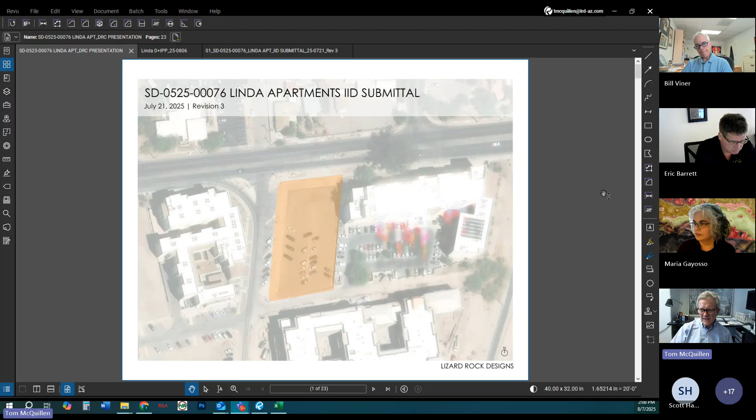As Maria mentioned, we've been through a couple of reviews, both with staff and with Rick, and had a couple meetings to go over and clarify some things.

As was pointed out, this is in C2 and C3 zoning, with a little slice of C2 on this side. It's at the corner of Linda and Congress, Sentinel to the east, West End Apartments to the west. Those are both income-qualified apartments. Bautista, which is a project we're working on, is to the south and is market rate. Monier is over in this direction.

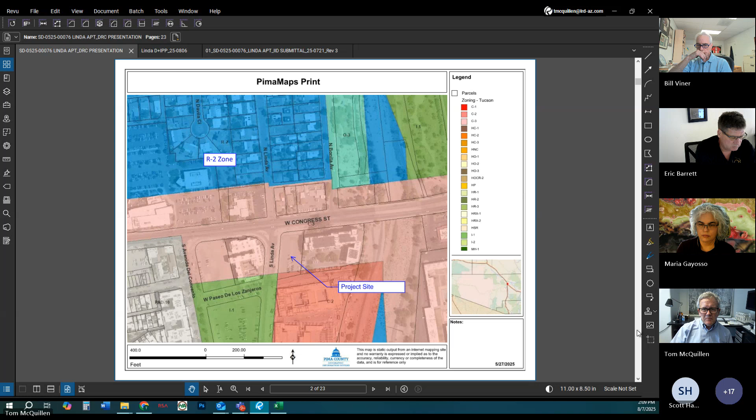Just to remind everyone which site we're talking about, we've got a couple of aerial shots. First, looking from the west towards the east, you can see the end of Sentinel here, at 5 stories. Then you can see the side of Bautista, which is a mix from 2 stories at the front to 3 to 5 to 4 as you go to the back.

This is a street level view of that same area. The site itself right now is empty, being used as a temporary parking lot. It has DG on it right now. And here's the same view from the north, looking to the southeast. In the street view you've got Sentinel here and Bautista in the distance, and West End over to the west.

Quick question: On view 4, the current sidewalk that's there with the parking end in it, is the property line basically to the curb line, and is the sidewalk currently on your site? That's what I'm gathering from your plans. And that's why you're putting in a new sidewalk plan on the west side?

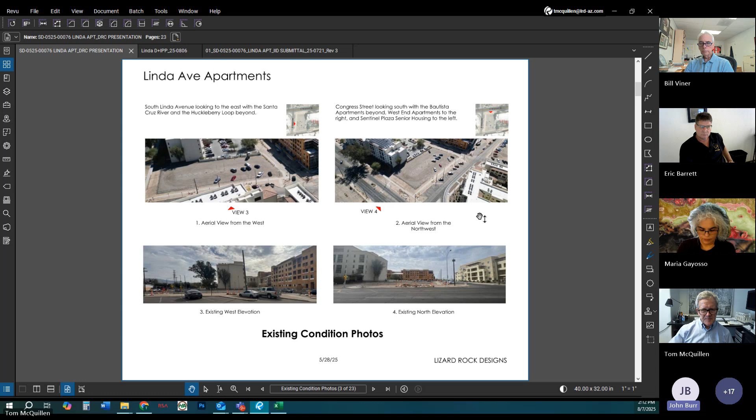So these are a couple of views from pretty much every corner here. This one is from the northwest, looking to the southeast. That's the stair and plaza area in front of it, and there's also a ramp that goes up to the entrance. This is the landscaping I was talking about, trying to get a shaded walking connection down to Bautista and over towards Sentinel.

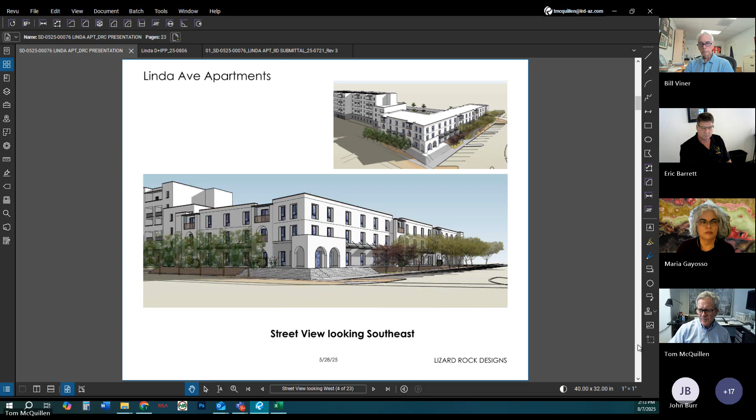These are the actual trees specified in the plan. This is a view from the southeast corner looking towards the northwest. There'll be a screened parking area in the back, with the required number of shade trees in the parking. The refuse area is right at the corner here, which you can see. I can point it out in more detail on the civil drawings when I get a little further along.

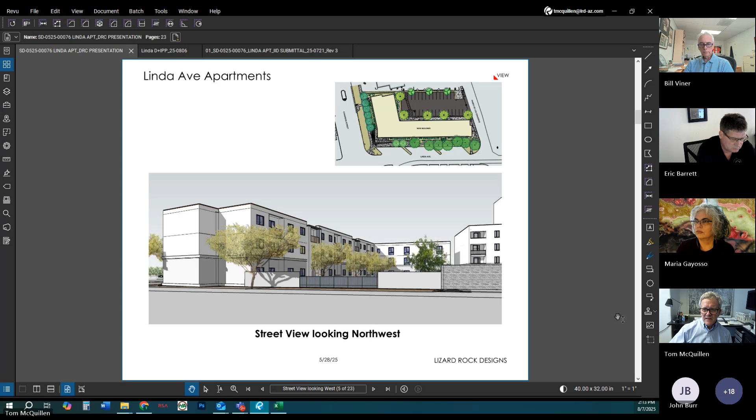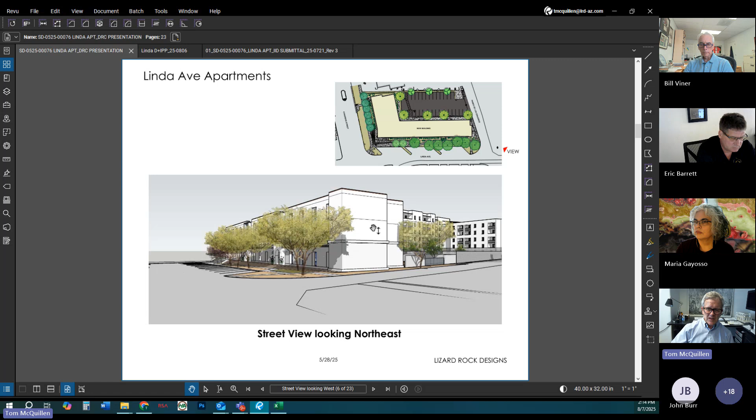And then again, from the southwest looking towards the northeast, basically this is at the high side of the site. It drops about almost up to 3 feet down on this side. You can see Sentinel in the back, which steps from almost 6.5, almost 7 stories down to 6, and then 5 when it comes to where we're at.

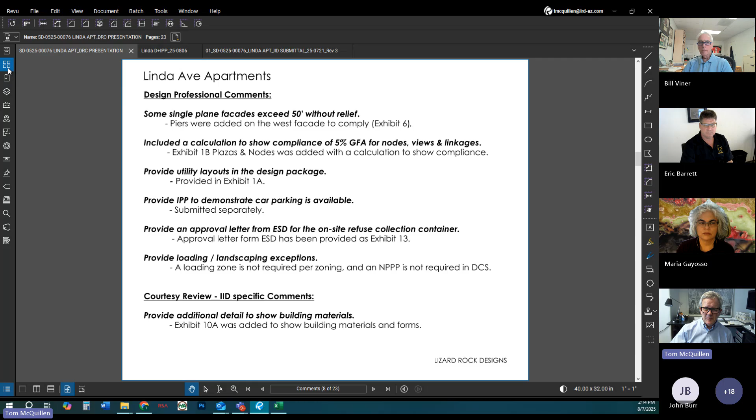So I took the comments direct from our last review with Rick, and then the one pertinent comment from the courtesy review. I was going to, if it's all right with you, go through each of them and then go to the exhibit that responded to it. And at the end, I'll run through everything just to see if there are any questions or any parts that I missed.

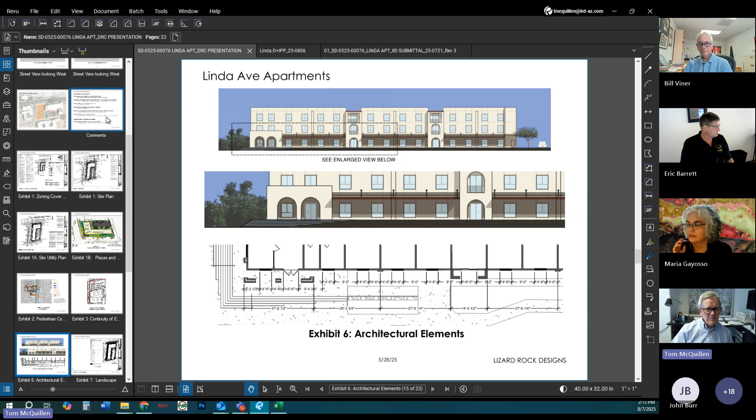So one of the initial comments was that there were two or three sections of the west elevation where the length was 54 feet, and the prescriptive limit on that is 50 feet. In Exhibit 6 here, this shows what we've done to bring some relief to it. We added engaged piers in between each one of these, and it's basically cut that distance in half. It seems like a small change, but actually in one of the bays, we had to flip every layout in it. But we've got the required relief in the facade there.

Rick had asked us to include a calculation to show that we had 5% of the gross floor area in an exterior plaza open to the public. So we added this diagram, by our landscape person, that shows the area behind the public sidewalk here, which is equal to a little bit more than 5% of the gross floor area. Now it does extend over to this landscaped area, and it extends back into here, but we wanted to just demonstrate compliance with that diagram.

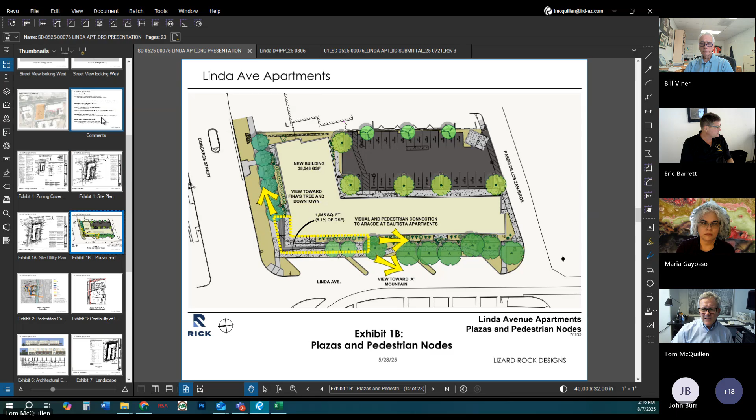And there was a request that we show the utility layouts. So in our civil, we've got the base cover sheet that has all the data, number of units, number of parking spaces, square footage, all that. Then our actual site plan that shows the new sidewalk and the connections, which was related to another comment, and then we added the utility plan.

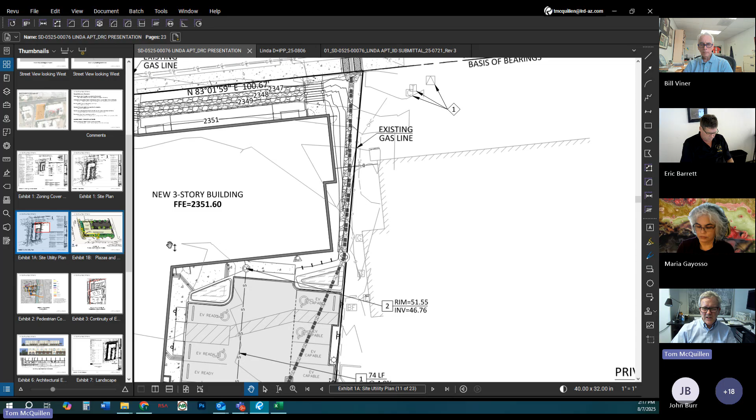Just to run through the utilities right now, TEP is telling us they want to bring transformers into here and go to two essentially meter packs within the parking area. We have a gas line up here that connects in through the building and then feeds a central hot water heater.

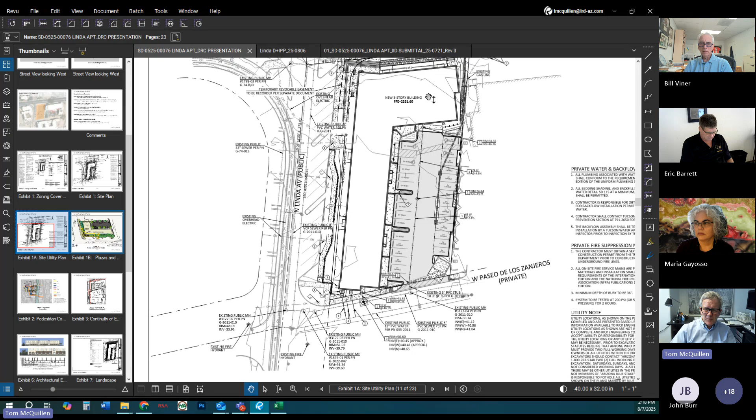Most of the other connections are on the south side of the site. So there's water, there's fire. There are two sewer connections, one to a new manhole right there, and that serves basically the south wing of this building, and a second one that comes all the way up through here to serve this portion of it, and then connects directly into the existing sewer line there. I think that covers everything for the utilities.

So then one of the comments in a couple locations was to provide an IPP to demonstrate that the car parking is available. And that's obviously been submitted separately. As Maria mentioned, it's being reviewed right now. I can talk in general terms about the IPP if there's a question about it, but I thought I would just leave that until a little bit later.

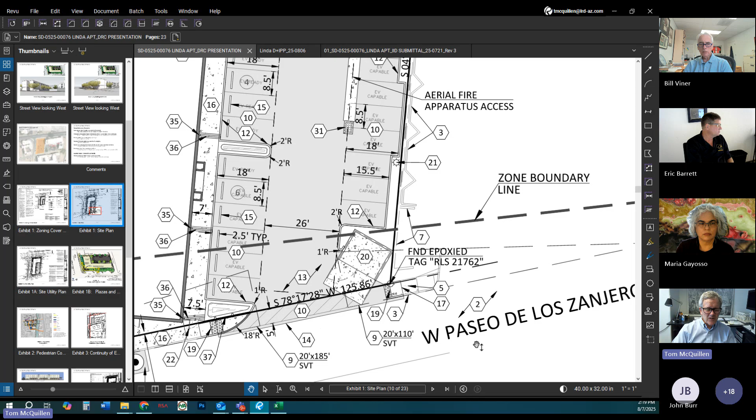Then the comment to provide an approval letter from Environmental Services, which we've got here. They've looked at the layout. The layout is pretty much the same as the typical layout, but it needed to be 2 feet wider. So we have a detail on the civil drawings that they've reviewed and signed off on. That's actually very similar to the layout that Sentinel has to the east of us.

And then there was a question about exceptions to the loading and some landscape requirements. I've summarized this - there's actually some detail in the application, but basically if it's entirely a multifamily project, the loading zone isn't required in zoning. And in the downtown core subdistrict, an NPPP is not required.

Then there was a request at the courtesy review that we provide more information about what the materials were going to be like. Now, these are some further developed elevations from what we showed in the initial courtesy review. Overall, it's primarily a stucco building with some arches and a darker colored base to it. The height is 37.5 feet to the parapet wall.

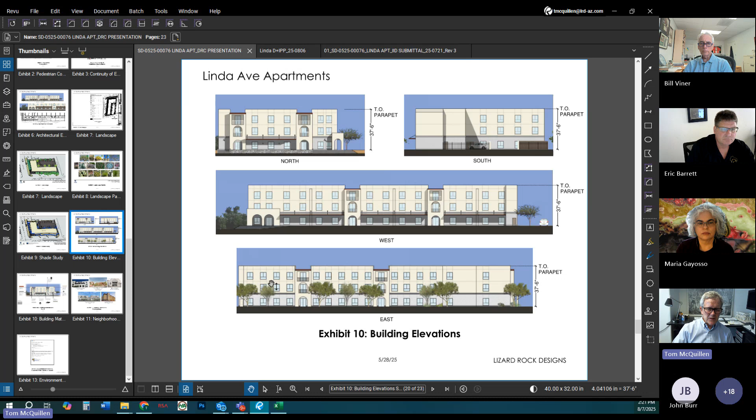By comparison, Sentinel to the east is about 2 stories taller than that. And as I mentioned, it steps down from almost seven stories to 6, to 5, to this, which is about 3.5 stories at the parapet. But we also provided this exhibit, which calls out in more detail the colors.

So our base color is basically a color called bone white. It's been used on, I believe, Monnier, and we've got a similar color on Bautista.

The darker base colors are 2 different shades of a warm gray. And then we've got accent colors that are basically terracotta on some of those linear pieces, including these suspended canopies. I know the canopies were shown as individual pieces in the original perspective, but they're actually going to be continuous like they're shown here.

And then we've got a taupe color for the window frames, essentially the same color we used on Bautista. And any scuppers, downspouts, and all that are in a dark bronze color to match the attachment pieces, the railings, and the rest of the project.

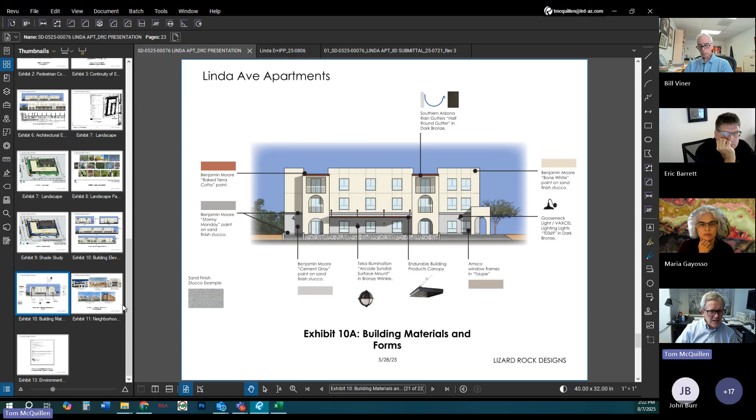And just to look at some examples around, you've got the Mercado, where those suspended canopies are shown. The Sentinel was a little bit yellower color of stucco. Monnier was closer to that bone white color, as is Bautista. Sentinel and Bautista have some accent colors very similar to it. And again, I had pointed out the engaged piers from Monnier.

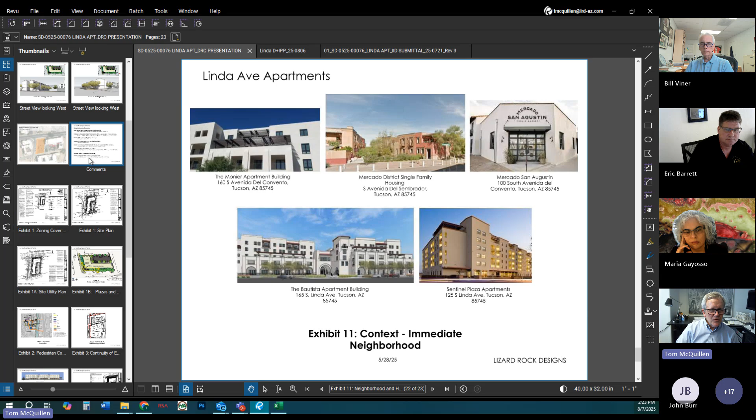So the intent is to pick up the language and some of the details from the four other major buildings that have been built in this area. So I'll just go back to here. Those are the comments. I can take you through any of the details.

I think Maria went through some of them. It's 77 units, about 38,500 square feet of construction. It's a mix of 2 bedrooms, 1 bedrooms, and studios. The majority are studios and 1 bedrooms. And I mentioned the height, roughly 37.5 feet.

And then the parking, there are approximately 25 spaces on site. The IPP takes advantage of existing unallocated surface and street parking. That comes from doing an analysis of this area south of Congress, of all the available parking spaces, and comparing it to all of the existing IPPs that have already been filed.

So, sorry, was there a question? I have some questions regarding the parking.

Okay, are you going to have a long-term lease arrangement with somebody else to provide more parking? You're at 0.30 per unit right now. How does that work?

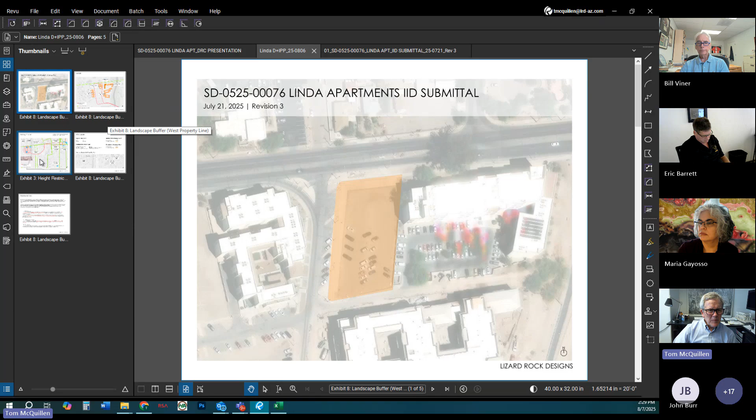So I can talk a little bit about that, and maybe what I could do real quick is just talk about the calculation I was mentioning before for the IPP. This is a really simplified two-sentence summary of a 30-page document, but the IPP is confined to this area south of Congress. It does not rely on a mythical parking garage at the center.

It does include every project that's currently either under construction or in permitting in that total of required, possible required parking spaces. And when you go through and account for all of what's available either on streets or in temporary lots, there are still 53 surplus spaces, I'd call them.

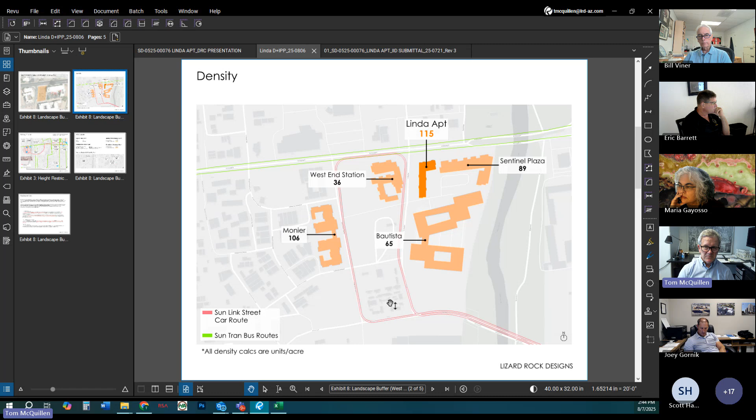I think what Steve has been saying, just to amplify it a little bit—if you go up, let's say you've got structured parking, which would be less than underground parking, and then you go, let's say 5 over 2, you've got the cost of the structured parking, which is $60,000 to $100,000 per space. You've got an elevator, which for a 7-story building is going to be in the $150,000 to possibly $200,000 cost range. And then you have to go from type 5 construction to type 3 over type 1, and that's, in simple terms, about a 100% increase per square foot. When you add all those costs to the project, you can't possibly make it something affordable that this person could afford to live in.

So these are walk-ups—there's no elevator in your building? No, there's no elevator. It's 2 flights of stairs up. We never got floor plans, so... I wasn't aware we needed to submit floor plans. You don't. Okay.

Well, that explains for me why there's no senior adults in the project—unless they're very fit senior adults who can go upstairs, but it's 2 flights of stairs.

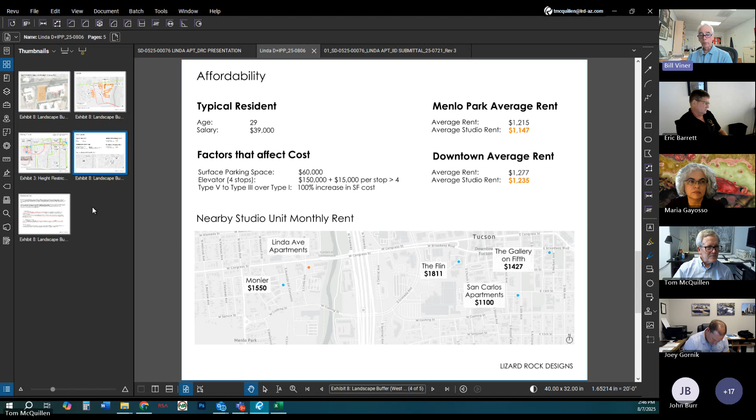Yeah. Anyway, my primary concern is that once all the buildings are built in this neighborhood and there isn't enough parking for the people that live in those buildings, I don't know where they're going to park. They're going to park in places that are uncomfortable for the balance of the neighborhood. That's just my thinking. At a 0.30 ratio—I'm in the same business, I've never built anything at that low ratio, but again, I've never built anything in the downtown area. So, anyway, that was just my concern.

I have that concern as well, Bill, in terms of some people parking their cars in Menlo Park and taking away spaces for residents who have to park on the street. I think that's one of the things that needs to be considered in this. You may have units with 2 cars that come in, regardless of what you're thinking in terms of public transportation. So there's always that part of it too.

In 20 plus projects, we don't have anybody with 2 cars. So that's, I mean, you could say that, but that's not a reality in our type of project.

Eric has his hand up.

Eric? Yeah, thank you. So I guess the short answer for me, part one, I believe this whole development was designed and placed here because of the demographics that support low amounts of parking with the clientele there, the Mercado overall development. It sounds like we have an excess in addition to what's already been allocated of 53 additional spaces that would not be accounted for, that could go to other developments as they're moving forward. And last, in the chicken and egg discussion, if we want to create an environment of less urban sprawl and more density, then we need to do things that take this kind of stance. So if I factor all those in, I'm for the project. I can't not be for the project based on what my understanding is the city of Tucson's trying to drive, what this Mercado development is trying to drive, and what now this developer coming into Tucson is trying to drive. So all those things being equal, they've met the intent and requirement of the project.

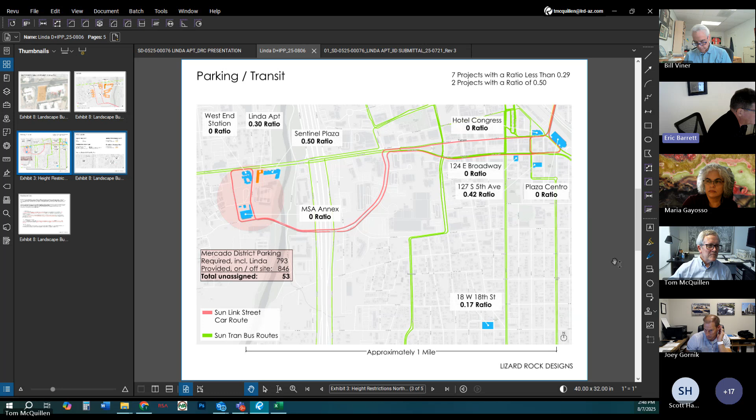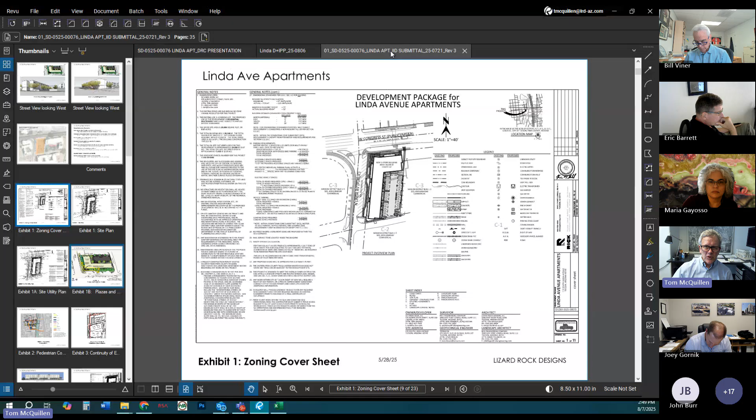Well, first we need to see if there's any more comments from either staff, the presenters, or committee members. Is there more you want to show, Tom? No, I mean, I did bring our full submittal, but primarily we've listed the 4 things that are kind of asks from the IID process.

I do have one question. The newer perspective shots that you included make it look like it's a solid masonry building with deep inset windows, but when I look at the floor plan, it looks like they're inset 2 inches. Can you confirm how deeply inset the windows actually are? Because if you look at the front version, the shadow line makes it look almost, or just go to the west elevation, it makes all the windows look like they're inset by about a foot, but they're relatively flush, being only 2 or 3 inches within a 6-inch frame wall, or even 8-inch.

You're on mute. You're on mute. Hey Tom, I'm mute, thanks. I got it, can you hear me now? There we go. Yes, yeah.

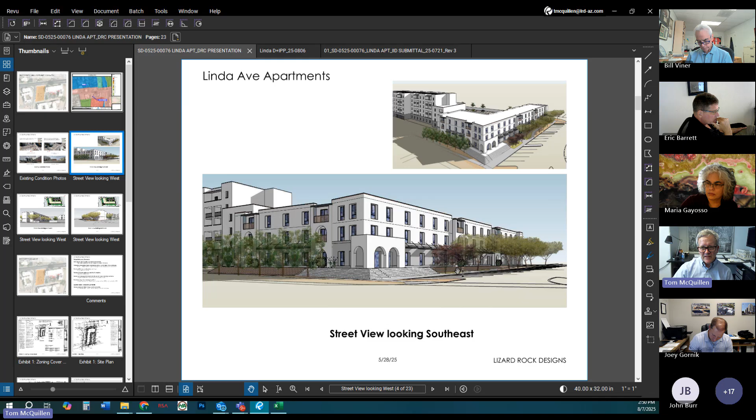So you're correct, this one was an earlier view. Unfortunately, I don't think we will have windows that are that inset. They're probably more like this view. Yeah, they're about 2 inches in from what it looks like. Yeah, they're a little bit more than that, but because of the foam that we have on the project, the relief, part of the aesthetic of the building is that the relief comes from these sort of tower elements, and then the rest of it is planar. It's similar to what was done at Sentinel. At least they're not flush. Yeah, I agree, I agree.

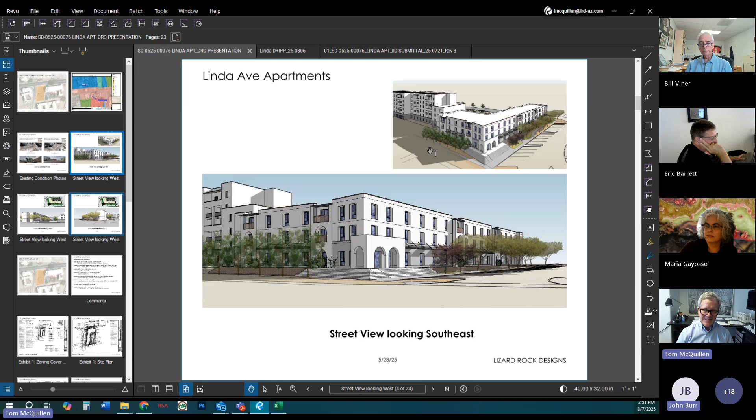Okay, I won't ask the contractor to comment. I just wanted to make that clarified. Thanks, I understand your comment, and we hope we can find a way to do that in the future, that doesn't bust the budget.

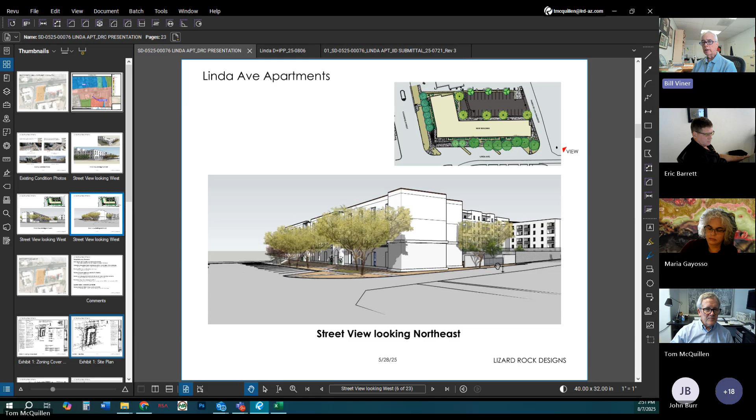Okay, just one other comment. Did you say earlier that the parking is gated? In other words, the spaces are private, you need something to enter, and then there, is that true or not? It's fenced, it does not have an electronic gate to it. So the parking is open then, correct? Yeah, but it's fenced on all sides, so it's a controlled parking lot, people can't walk through it. By the way, I'm not opposed to that, Tom. If this group wants a gate, we'll put a gate. Again, not opposed to that if that's something that's needed.

I was actually more concerned about, are you going to see the dumpster right on the street unless it's hidden by a gate? And I think that it is hidden, correct, Tom? Yeah, it has doors on it that staff come out and open when it's time for the trash service to come pick up the dumpster. But it's pretty standard for the city of Tucson, they have their requirements you have to have.

So you may choose to add a gate at a later time if you need to control the parking more, to make sure it isn't open season, so the allocated spaces stay allocated. It's not in the current plan, but I'm not opposed to it. I don't know that it's a requirement. But if it became a problem, we would do it.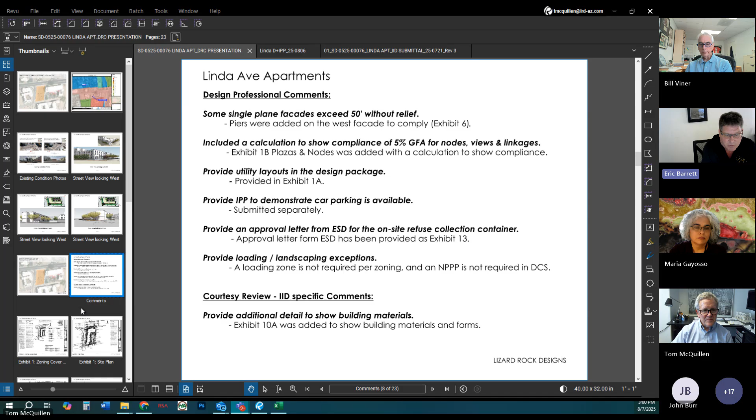Honestly, my true opinion is I'd rather have less roads and less parking and more open space and landscape. If we're trying to go more urban like I stated before, we can't keep providing more parking because that requires more roads. So if we're not trying to be California and provide roads everywhere, let's not do that.

But let's not hold a developer trying to do a project hostage if we're supposed to be saying we're going to be this kind of community.

So I think it's the chicken-egg scenario you're bringing up, but at the same time the developer is trying to do what they've been asked to do. This has got an awful lot of shade trees, where it's hard to put shade trees in a downtown urban development, which I'm honestly not really opposed to.

The other thing I think we need to keep in mind—even though a lot of the players are the same—the two different projects we looked at together are actually separate projects in separate zones with separate development partners, so they're not as related as we might think.

So in my mind, this project for this particular site meets the criteria to approve it as presented, with the condition that we encourage the planning director to initiate a survey of actual spaces before any further IPPs are made in this area.

Or try to find a way to provide public parking garage or whatever. Well, that's great, but the city of Tucson discovered it was bankrupt the last time it built garages, so that's never going to happen at a municipal level. Exactly, it's just not going to happen.

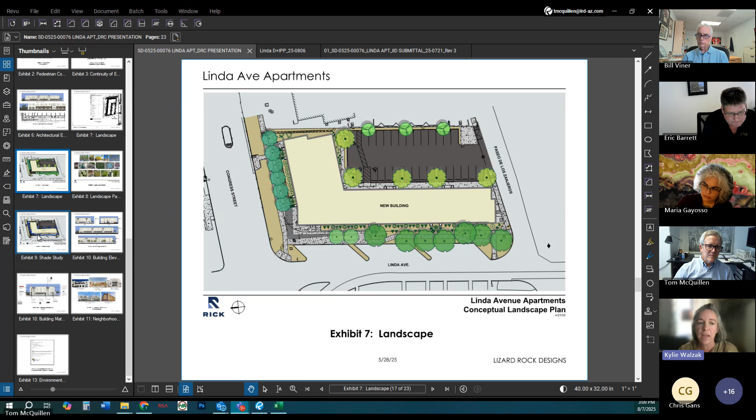Also, speaking of transit users, if we wanted to really market this towards transit users, we would make this more accessible for people with disabilities. The stairs at the front entrance make it so people who are wheelchair bound or have mobility difficulties can't really rent here. I know that's not your charge, I know you're not tasked with building that, but I just want to point out that people who rely on transit often have disabilities and can't use stairs to walk up and down.

Do you have a ramp on there? I don't know if I could see it. Okay, great. It looked like the ramp though took them really far out of the way to get to the streetcar stop or the bus stop. The bus stop is right across the street on Linda to the west.

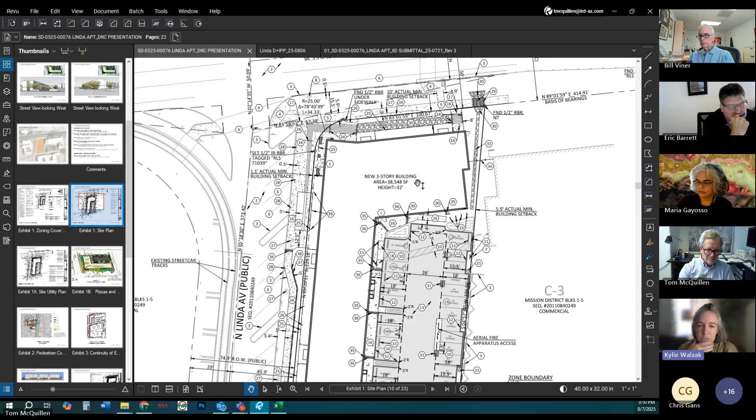And then last, I just wanted to respond to the comments about density. When we're talking about density, it's not necessarily calculations per unit, but it is height. I do want to point out, as was mentioned, the Sentinel Plaza apartments to the east are 6 stories, and West End Station to the west is 4 stories.

And Bautista to the south are 5 stories, this one's 3. When you say in your comments that you're scaling down, my question is scaling down to what? Because West End across the street is tall. We prefer to see this be taller and have more units.

Thank you. Can you state your address as well, Ms. Walzak? This is Kylie Walzak, and my address is 232 North Melrose Avenue. You're the president of the Menlo Park Neighborhood Association, is that correct? Correct, but we did not vet these comments with the association, so these are my comments alone.

Thank you. Any other comments? Tom's got his hand up twice. I think he wants to respond. I didn't mean to do it twice, I just didn't know what the protocol was. But I wanted to wait until everyone had a chance to speak. But it was just two quick things.

One was just to clarify the comment on density. We used the straight definition of density, which is units per acre. And in terms of the height and everything, I won't go through it again, but I'd refer you back to the data we provided about what happens when you go from 3 stories to 7 stories. The simple version is it becomes unaffordable for a person that fits the demographic in that exhibit.

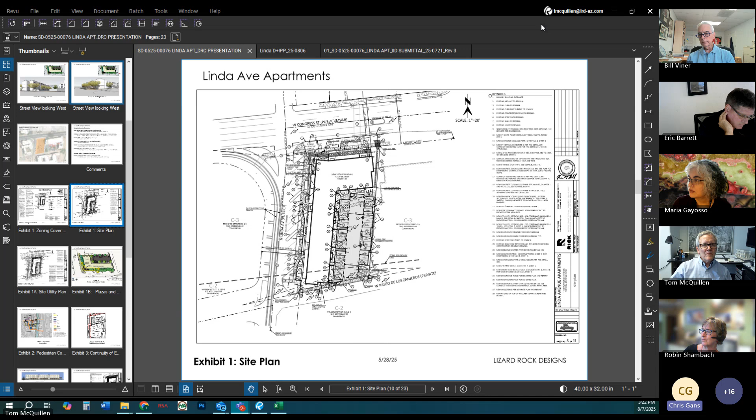Okay, here we go. Mr. Barrett? Aye. This is the roll call for voting on the motion. Mr. Burr? Aye. Mr. Gans? No. Mr. Gonzalez? Yes. Mr. Viner? Yes. I'm here as well, Chair, Maria.

Motion passes. Isn't Robin on the call? Pardon me? Robin's on the call. I am here as well. Oh, you made it. Okay. Can you let us know what time you arrived, Ms. Shambach?

Do you have any comments? I do not. Ms. Shambach, can I add you to the roll call, or is there anything else you need to say? You may. I am ready. Yes, my vote is yes. So, Mr. Gans, members of the DRC, the motion passes 5-1.

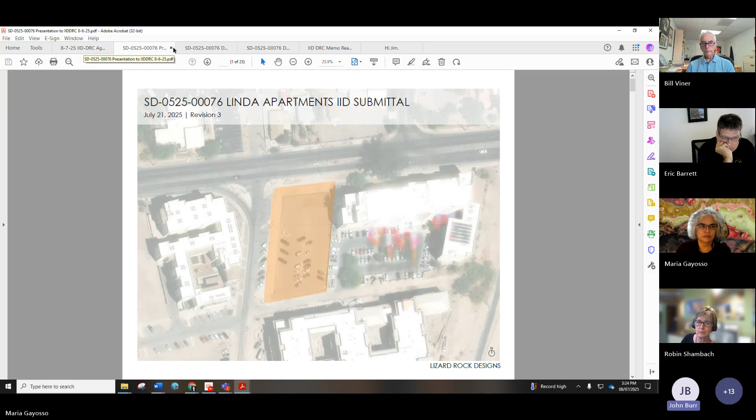I want to point out, Maria and I have been chatting because I had a hard time accessing Teams the last couple of days. I apologize I didn't get the version that was openable to Maria in time for you all to see and comment. There's still some typos, code errors, and other things, and I'll work on a revised draft so we can discuss it further. There's a bunch of stuff in the version posted on the agenda that I don't think we want to approve today without changing it, and I don't know that we want to be here for another hour and a half today. So I would like to make a motion to postpone it to the next meeting so that I can work with Maria to get a draft to you with ample time to review, so we can have a forthright discussion before we approve it.

That sounds like a good motion. Maria, will you make sure all the committee members have a copy of that prior to the meeting? Definitely, this one was posted also on your webpage, and I included it in the materials I emailed to you as well - I'll get the same one from 2023 as well.

So, John - this is Robin, I had a question. I was just trying to remember our bigger picture goal of updating these. Was this updating the document to make it consistent with other changes in the city requirements and code, or are there other underlying goals I should be considering when I review it?

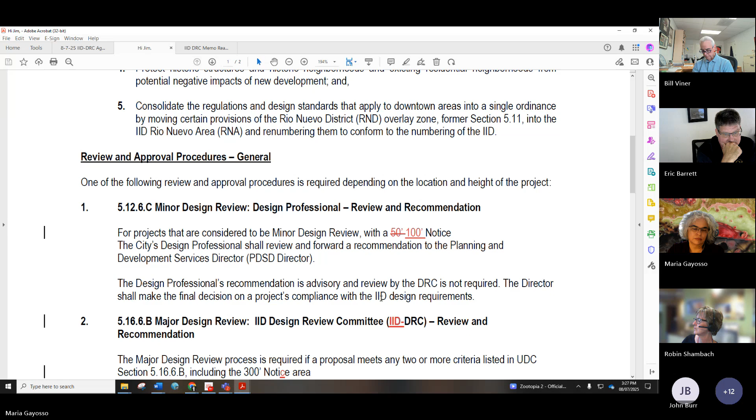Well, the thing about it is, this is based upon a document that was approved in 2015 when Jim Mazzocco was the planning director, and the IID was still in a draft phase, organized as a group under the city manager's office. So there are a whole bunch of typos - for instance, there is no such thing as UDC 5.16.6.B, it's 5.12. Other things, it says i.e. number 2 or number 3, but there's only 2 numbers above, not a 3, because that was removed at an earlier revision.

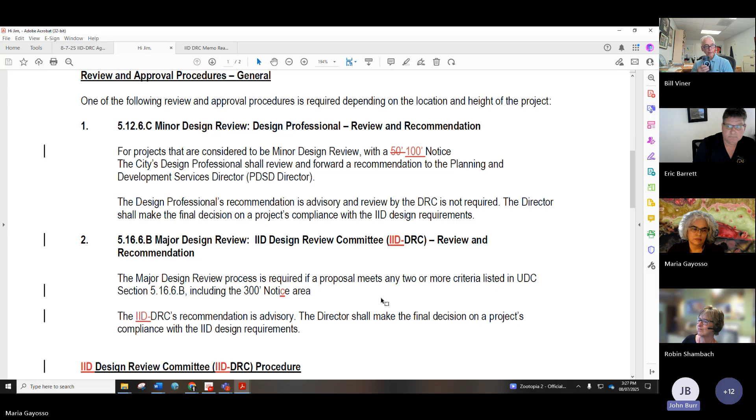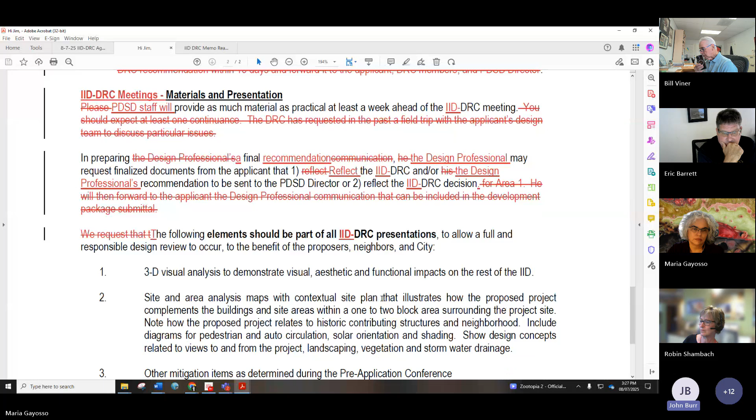And then some other process changes have happened over time. So it's evolved to where basically staff has the burden to do all the work, and the design professional has to do all the work, and we only look at a project at the very end. But we were originally organized to provide courtesy review and input to developers so they didn't incur inordinate cost up front without getting an idea if they were on the right track before actually submitting a development proposal. So I thought it might behoove us to add language so that option was available to applicants.

Mr. Chair, members of the DRC, regarding that last statement from Mr. Burr, staff always encourages applicants to go before the DRC with their project as a courtesy review before they formally submit their design package for formal review. And actually, you've done a great job of that, Maria. It's not your fault that applicants often choose not to.

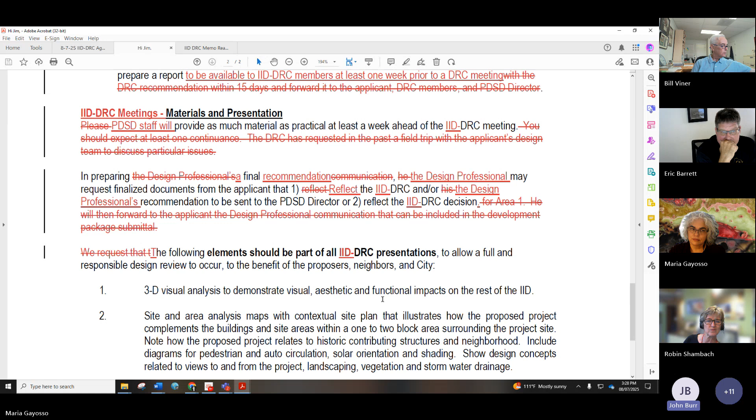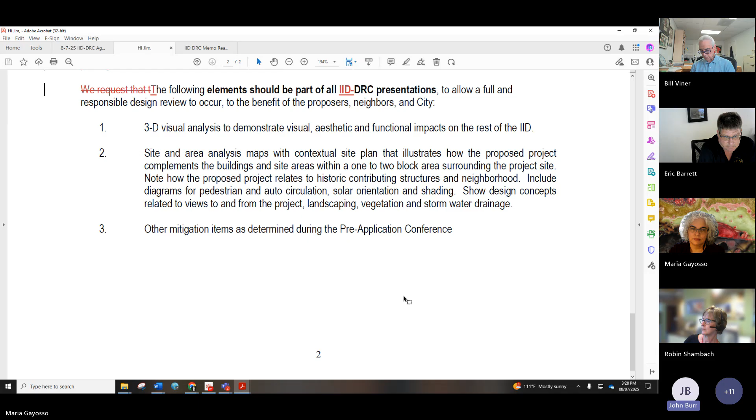But if there's language that suggests that it might save them money to do so, it could be helpful, even if it's not binding. Also, the code itself allows us a little bit more leeway in what we can request outside of just a standard application, and our ability to review things so that it's not all on the design professional to get confirmation of everything before we even see it.

So I just had some thoughts. You all may too. You're welcome to send me any comments, or send comments to Maria and she can share it among the group as we move forward. But I still don't think that the one we're looking at today is what we should approve.

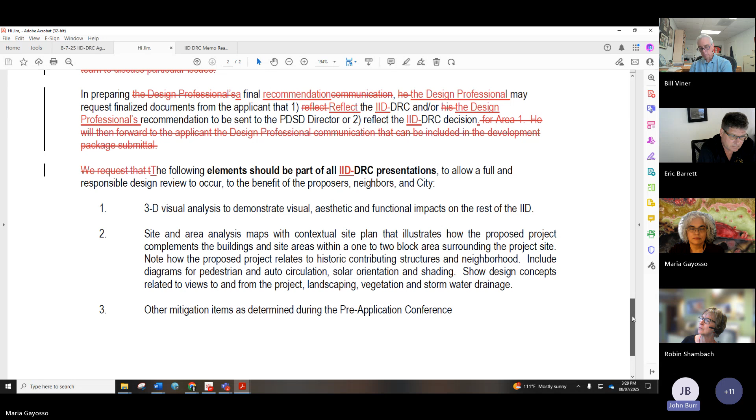Noted, thank you for that background and context. John, Robin, everyone in general, I agree with this, but based on our discussion today, I'm going to recommend that you either have an active civil engineer on the IID to address this parking item specifically, or a planner or someone, because I don't think it's our purview to identify and sign off on parking standards and requirements for downtown Tucson, not knowing all the projects going on. Unfortunately, that's the case for almost every review board, but I think it'd be fine to add that position to the roster of potentials. We're going down a path where either the city of Tucson needs to step up and really address it, or it's put on our shoulders to bear. It's improper in my opinion.

Let's call the vote on the comment about postponing it. All in favor? Did I hear a second, Mr. Chair? Who seconded the motion? Robin seconded it, I made the motion. Thank you, to postpone.